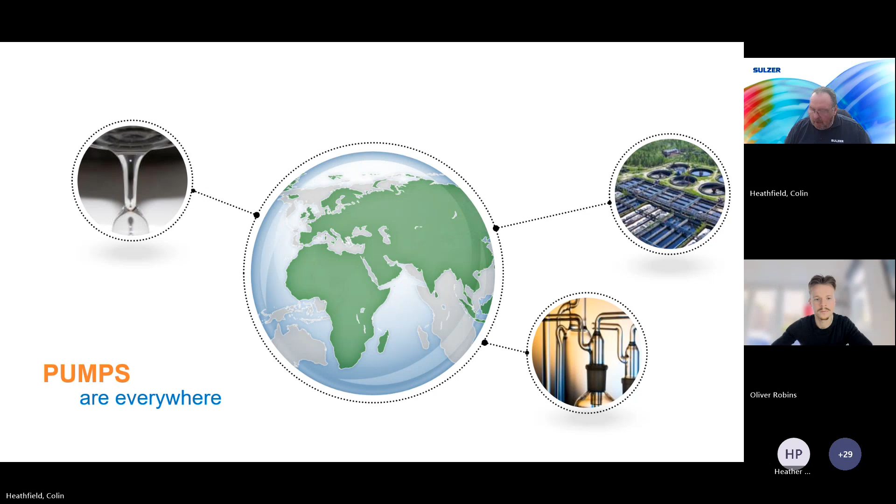And a pump forms part of what we call a system, because you've got a pump, the pump moves, and I'm going to say liquid, and I'm going to use the term liquid very loosely, because the pump is part of a flow system. The pump moves the liquid, but you want to move that liquid from somewhere.

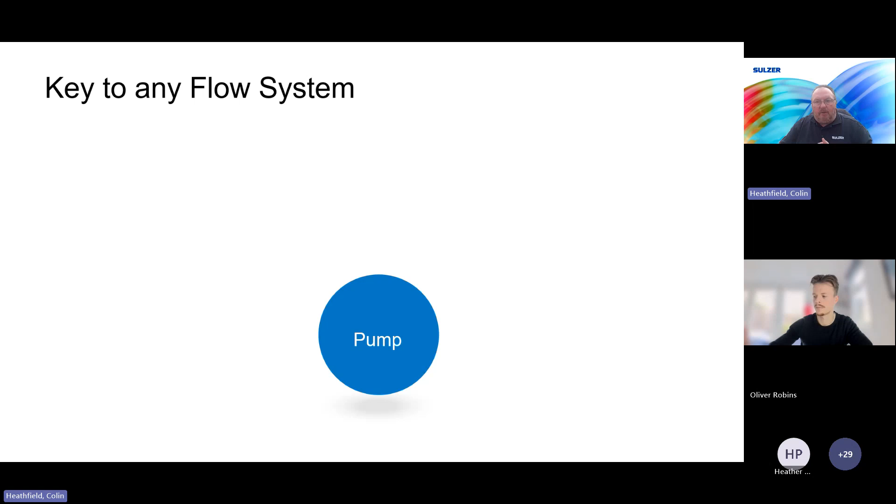We call that the suction side. It's where you're going to pull the liquid from, whether it's a pump just dropped into a swimming pool or whatever, it's going to pull that liquid through. So that's called the suction side.

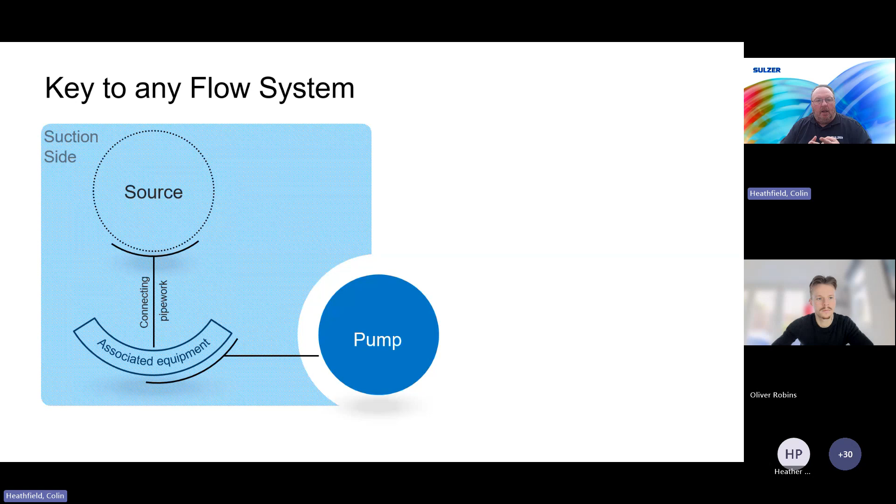And on that suction side, you have a source, you have connecting pipe work, and I've put there the phrase associated equipment. You'll have come across pressure gauges, temperature gauges, you can have flow meters, you can have things injecting liquid into the pump, and then it goes into the pump.

The pump then moves it to what we call the discharge side. And again, you get the associated equipment, the connecting pipe work to the discharge point.

Now, the key thing of this, the key takeaway, is you have a pump in the system, but there's a source where you need the liquid to come from and a discharge point where you want the liquid to go. You get sort of pump geeks like me that say, right, this pump goes there, can do this, can do that. But look at it as a whole system, not just the pump, because the system has an impact on which pump technology and what you're trying to do.

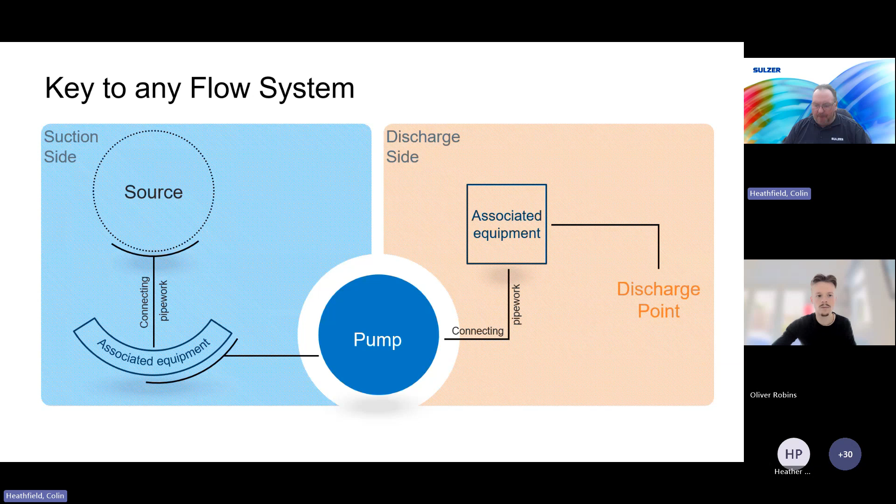But the key to the flow system is the pump. So we look at a flow system and we've got two parts. We've got what we call fluid dynamics and pump technology. Now, fluid dynamics are about the liquid, what you're trying to move, what you're trying to pump. What is the liquid or the media?

The flow rate is the rate at which you want it to move. The suction and the discharge are those two parts I've just explained. And then what do you need? Do you need accuracy? Do you need repeatability?

Do you need hygiene? You use those, dependent on the liquids. If everyone thinks it's pump to pump water, it's fairly easy. You get a flow rate, pressure head, which is the discharge pressure of the pump, and it's nice and easy. But say you're pumping sausage filling, or body cream, suddenly everything changes, and it might be different technologies and different ways of doing it. Say you're pumping an oil.

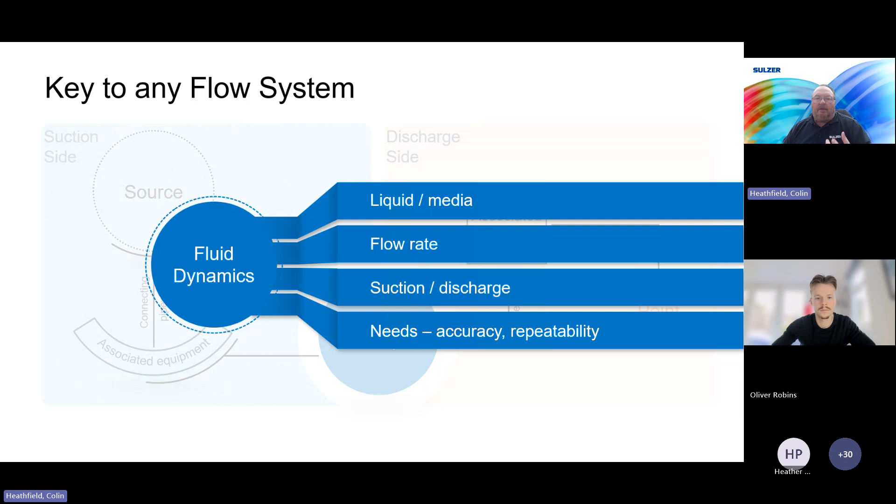So the fluid dynamics are a very critical part of what you're trying to do, to think of what pump technology you need, and you need to make it work. So you've always got to think of the fluid dynamics. And once you've thought of the fluid dynamics, you want to think of the best pump technology.

Then the area and the environment it's in. Again, another critical thing, because is it outside? Is it inside? Is it inside in a hygienic environment? Is it an explosive environment? I've pumped some very strange things over the years.

Maintenance. Is it easy to get to? Do you need to do maintenance? You don't want a pump that requires high maintenance, that you've got to have a confined spaces requirement to get down to, because it's hard work.

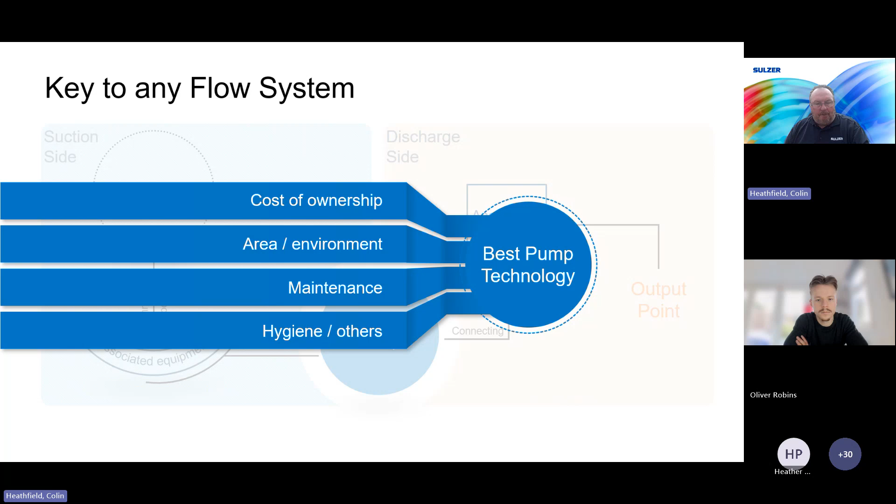And then I put hygienic, but there's hygienic, there's high temperature, there's high pressure. There's a lot of considerations to pick the best pump technology. And these are all important considerations for the flow system. And then once you've got the flow system, it all comes down to the pump.

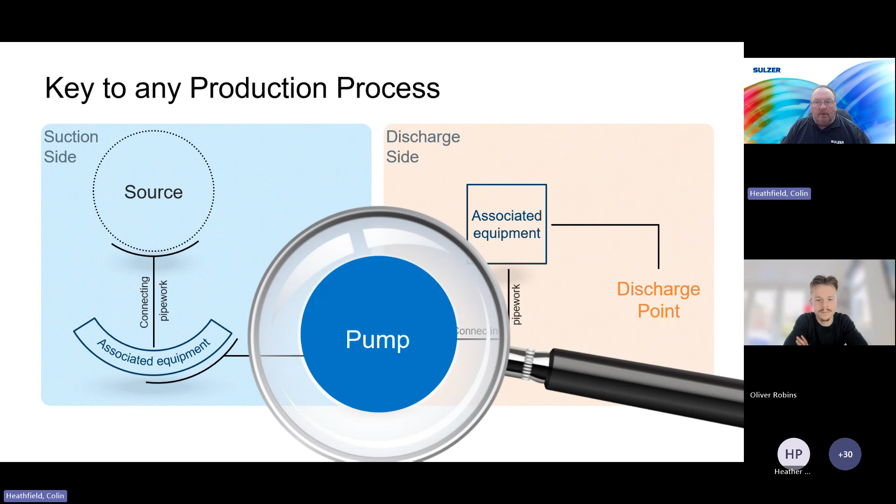So from that point, I'm going to talk to you about some pump technologies. I've got 6, 7, 8 pump technologies we can run through. Now, these are generic pictures of the pump technologies.

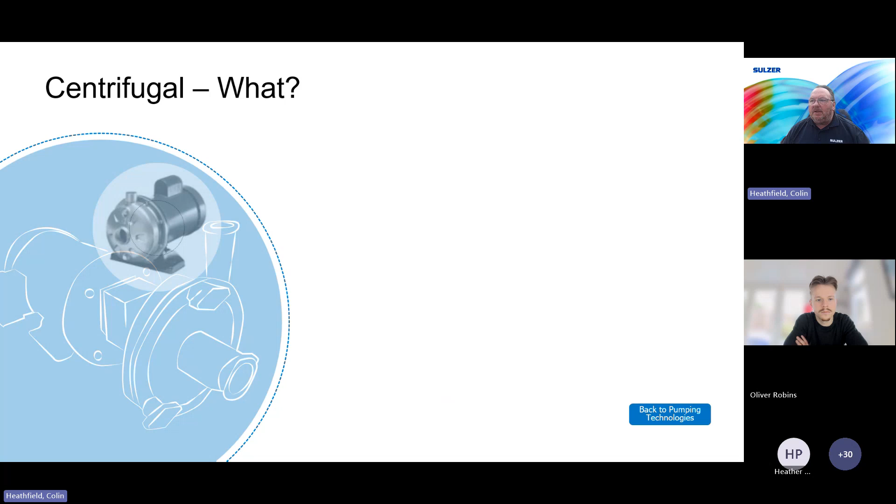They can be vertical, they can be horizontal, they have different impellers. But our life today wouldn't exist without these pumps. They're good for continuous duty. They are what we call a pulseless flow.

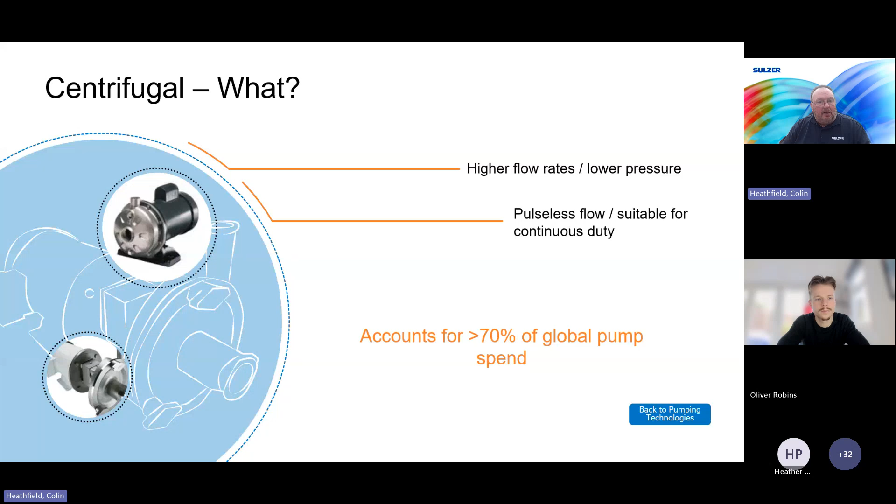So when you turn the kitchen tap on and the water comes out as a straight stream, that's a pulseless flow. And they can do very high flow rates. There's pumps that are bigger than me. I can sit at a table on a desk, sorry, on a chair inside the pump casing. They're that big. The secret is how they work.

So this is what we call an end suction centrifugal pump. This is just one example. If you look at it, there's a red bit in the center, which is called the impeller. Some refer to it as the spinny bit. So the impeller is where the liquid goes.

The liquid goes in what we call the suction side, although it doesn't do a true suction lift, it needs liquid there to go in. The liquid goes into the impeller, and then the impeller has vanes. If you look to the drawing on the right, these large vanes, and the impeller turns one direction, accelerating the liquid up these vanes into a specifically shaped volute casing.

So you see the volute casing, the blue line, that allows the liquid to then accelerate further to the discharge point, what's called the pressure side, and exit the pump. This is a rotational pump.

This is smooth flow. But the way this impeller works, there are many different types of impellers for abrasives, for solids, for soft solids, for hard solids, all sorts of things. We have recessed impellers, but they all fundamentally work in the same way, which is take the liquid, you see these particles spinning, send it, accelerate it round that volute casing and out. And that is essentially how a centrifugal pump works.

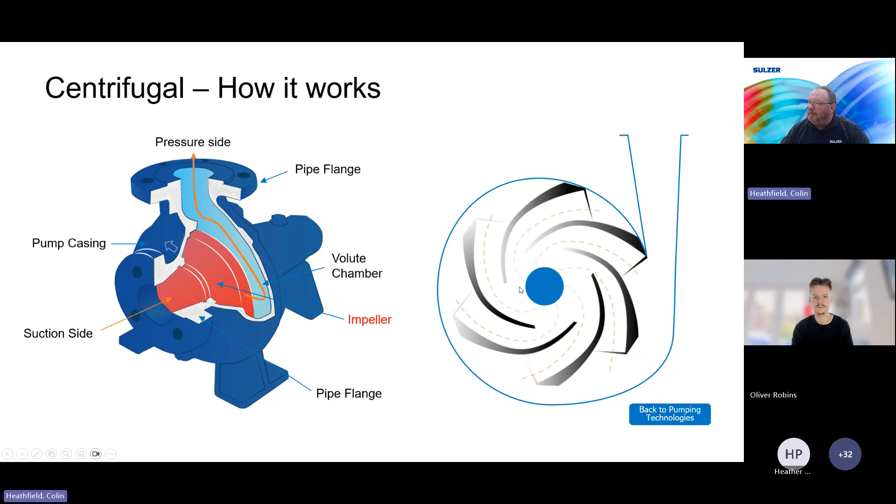If we think centrifugal, why? As I said, they're very efficient. They have a very good working life, and you can fit them with IE3 motors and things, so they give you a payback in that respect. In terms of the flow rate they can move, they don't take up a big footprint compared to some other technologies, and they're pulseless. They do have limitations.

They need liquid. They can't run dry. Run dry means running the pump without any liquid in it. They need liquid to run. We can adjust the flow rate slightly because we can fit what we call a VFD, a variable frequency drive, but there is limited control in adjusting the flow rate.

With extreme abrasives there are issues, but they are 70% widely used by the water authorities. They pump all the clean water in different formats, and then all the dirty water. Most things you use in life, from paint coatings to body products to hair products to a lot of foodstuffs, are used. These pumps are used within their production.

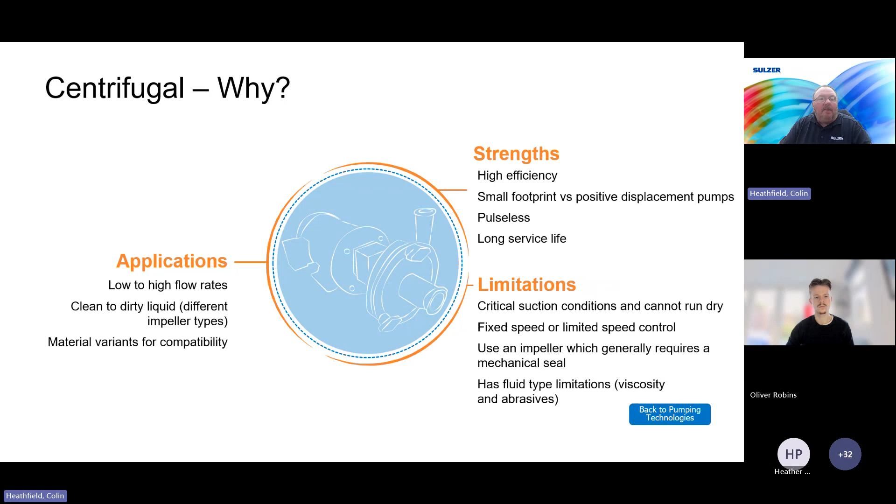That's my little bit on centrifugals. I'm going at pace, I'm afraid, because it is quite a lot to get through in the timescale.

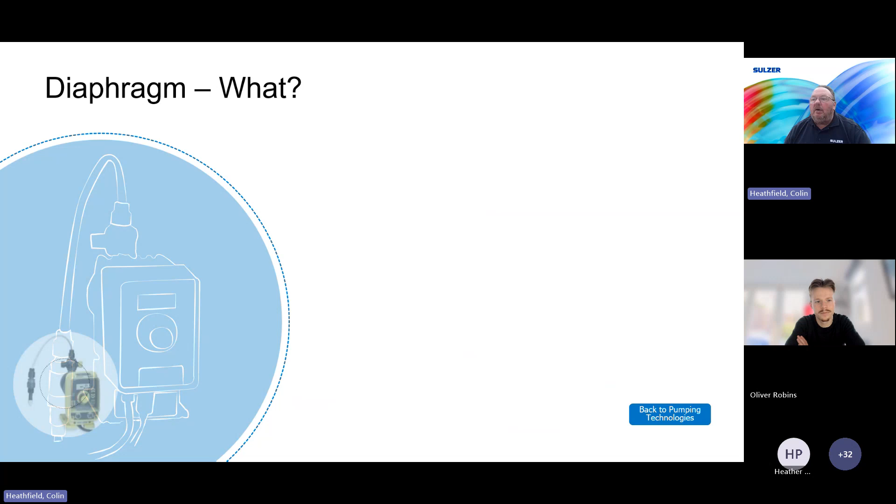The next one I'm going to talk about is a diaphragm pump. Some call it the flappy pump, because a diaphragm is a very basic pump. It has a minimal number of components in touch with the liquid. It is a true self-priming pump because it can pull liquid into itself, but only a limited amount. Within the industry, we define self-priming as just being able to pull liquid in. Some pumps can self-prime a lot more than others.

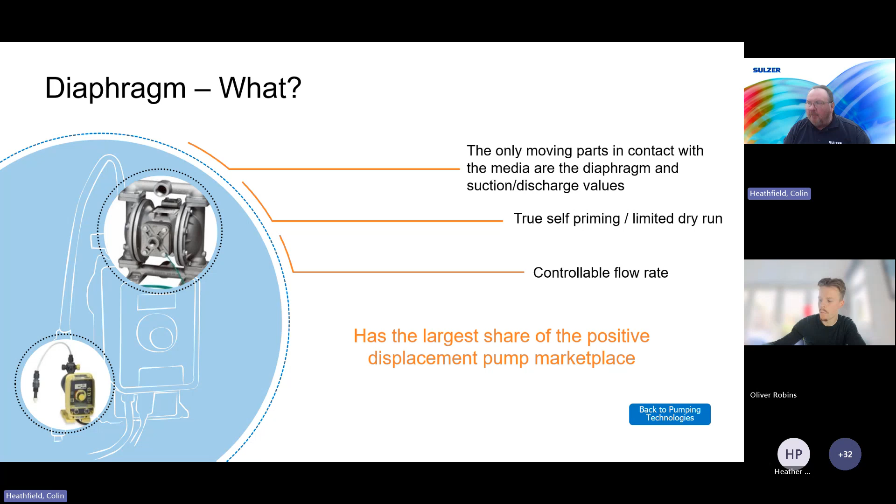Because a diaphragm is a very specific area that's moving, it's a very controllable flow rate. A diaphragm pump, as you can see from this animated drawing, has a suction side where the liquid comes in and a discharge side where the liquid goes out.

On the suction side, that's showing a ball valve. Can also be called a flap valve, but it's a ball valve. As the diaphragm pulls back and fills the chamber with orange liquid, it lifts the ball at the bottom, the ball valve, and pulls the liquid in. It's also pulling the discharge valve at the top down, sealing off that hole to ensure it fills with liquid. Then as the diaphragm moves forwards to empty the chamber, it pushes the liquid out the top past that ball and pushes the bottom ball into its hole to seal it and hold it there.

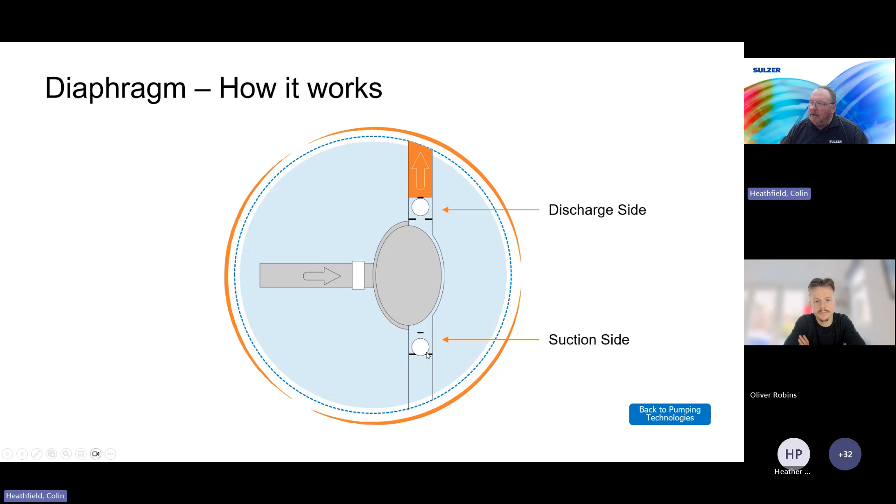It's not a complicated pump. It might be better explained by this drawing, which shows the pump filled in section 1, and you can see it's used something mechanical to pull the bar back and fill the chamber.

It then goes on to what we call the discharge stroke. It pushes forwards, starts to empty the pump chamber, pushes the bottom ball into its hole to seal that valve, known as a ball valve, and pushes the liquid out the top, which is drawing number 3. Then you get to drawing number 4, where the chamber is emptied.

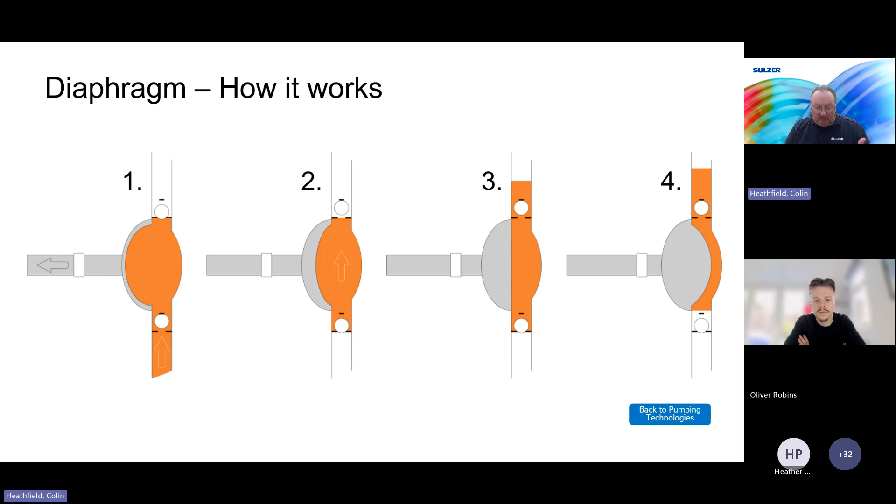It's again not complicated. But we have to think again, where would you use this pump as opposed to a centrifugal pump? These pumps can run on electric or air. Air is quite a favoured drive medium for them, so you have an air motor in there.

You look at the strengths, the applications, the limitations. They come in a variety of materials, and because of the nature of them, they can make them in plastics and some very chemically resistant plastics. They even go as far as, I know some companies do them in PTFE, which is one of the most resistant plastics we have. They're very good at going at a steady, repeatable flow.

The reason maintenance works well is because they're not a complicated pump. It's a very easy pump to strip and repair. There's not some of the finer assessments and adjustments you have on others.

They don't like abrasives, because if you think of those balls that are in the ball valves, if there's an abrasive flowing past that, it will wear the ball and stop it sealing. The ball will eventually—I've seen it where they come through that hole.

They're very good for chemical use. They're used a lot within the food industry as well, but they tend to try and use metal casings rather than plastic casings. This picture here is a very small one, so they're very good at small dosing. You may have seen them if you've been to some of the treatment works, used in the dosing capacity as a small version.

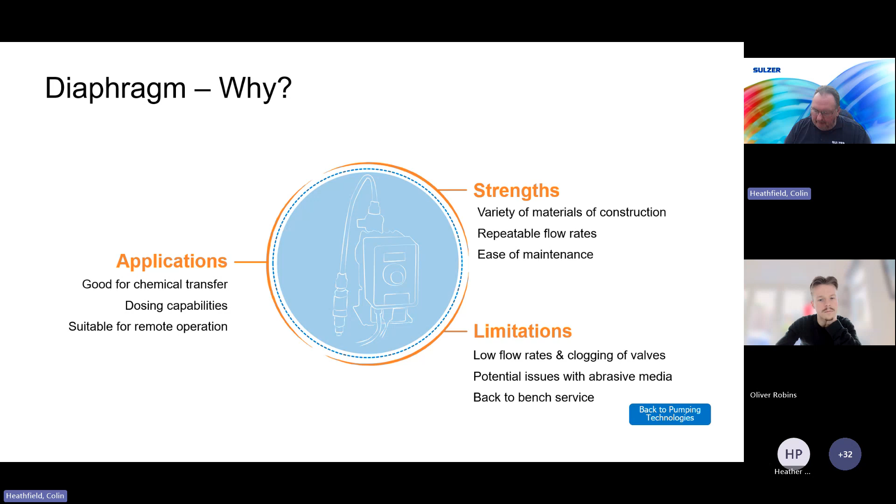That's essentially the diaphragm pump flying through these. The next one I'm going to go to is called a gear pump.

The gear pump, just a couple of examples, can be very small, what we call a micro gear pump, then come to a slightly larger version, and they can get bigger still. The thing with the gear pump, it's another spinny pump, very accurate and pulseless, but it can also achieve high pressure. So anywhere you're doing hydraulics, they're used a lot on diggers and things like that for the hydraulics to lift the arms.

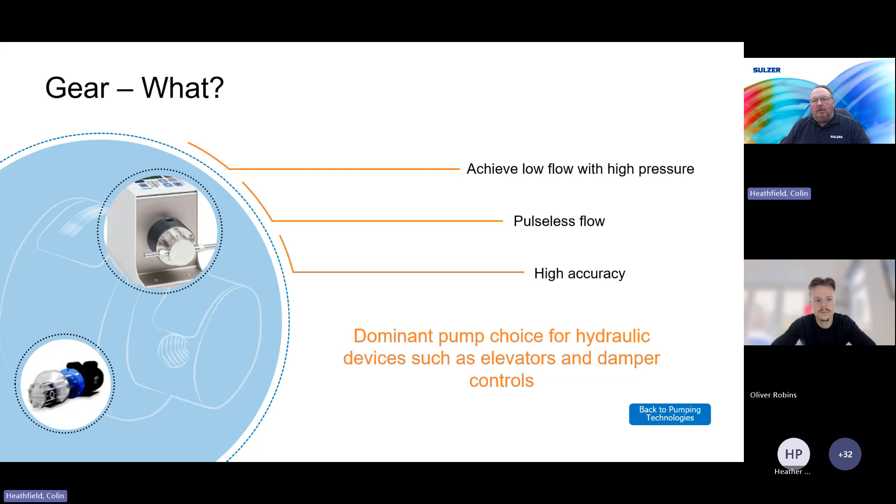Their operation isn't complicated. Again, one little picture for you. Liquid in, liquid goes round the outside of the gears. It's called a gear pump because it's two gears working together, one a driving gear and one a driven gear.

You have very key points: they have to seal against the outside of the chamber, and then they have to seal against themselves as they're put together. These gears can be made of plastic for chemical resistance or metal, dependent on what you're trying to do. But the sealing of the gears against themselves and against the outside is critical, because if you don't have those sealing points, i.e. the tips wear, then you'll get backflow. The V of the gears is called the mesh point, or the gear valley.

It's just the faster you spin the gears, the more liquid you push through it. So it's not a complicated technology as such, but having the understanding of what a gear pump is does help you understand what it's going to do. It's very good on things like oils, but you don't want to pump body cream because you would chop it up.

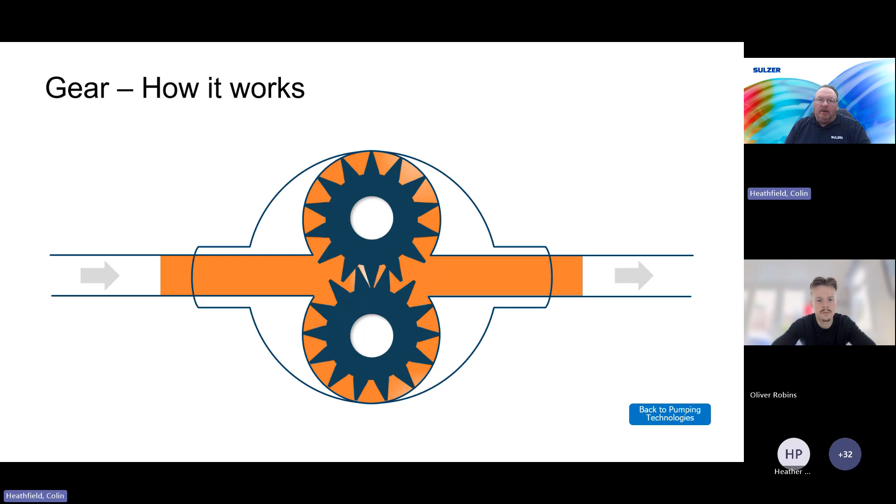That's why they're very strong within the hydraulic industry, but they're also very accurate for small dosing. You have the gear valley I was talking about, you have the mesh point I was talking about, and the top one is the driving gear and the bottom one is the driven gear. That's done by a cog behind, not gear to gear like that.

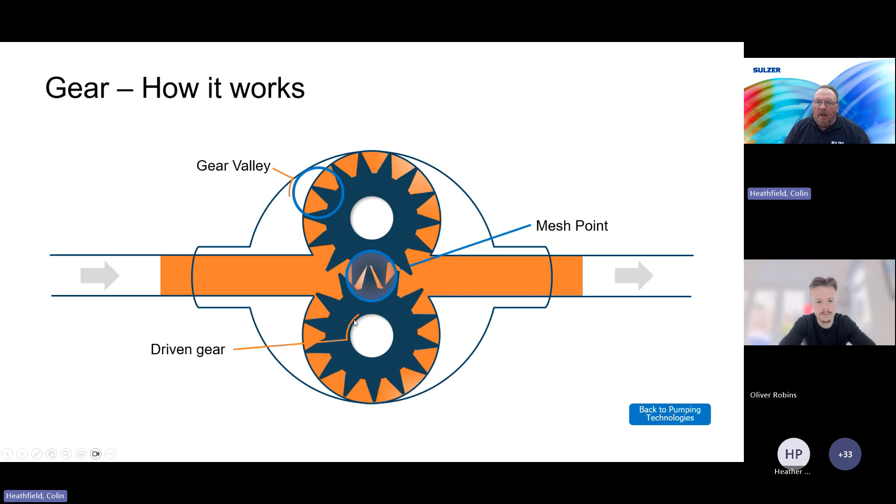And then you look at gear pumps and it's back to another why: good working life, but it's the accuracy and the medium viscosities. I've said the oils, we've said the hydraulics. They can't run dry, because if they run dry, the tips will heat up. Where there's contact, you get friction, friction creates heat, and that causes damage. But they are very accurate and they can go for very high pressures.

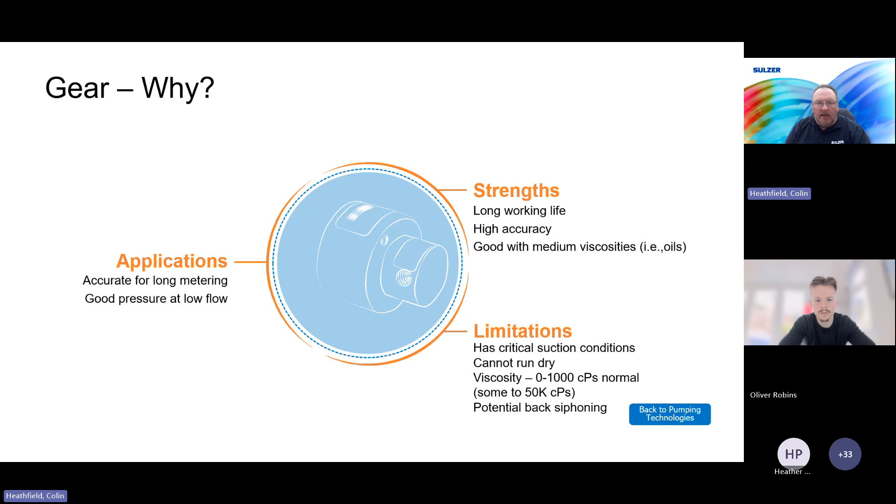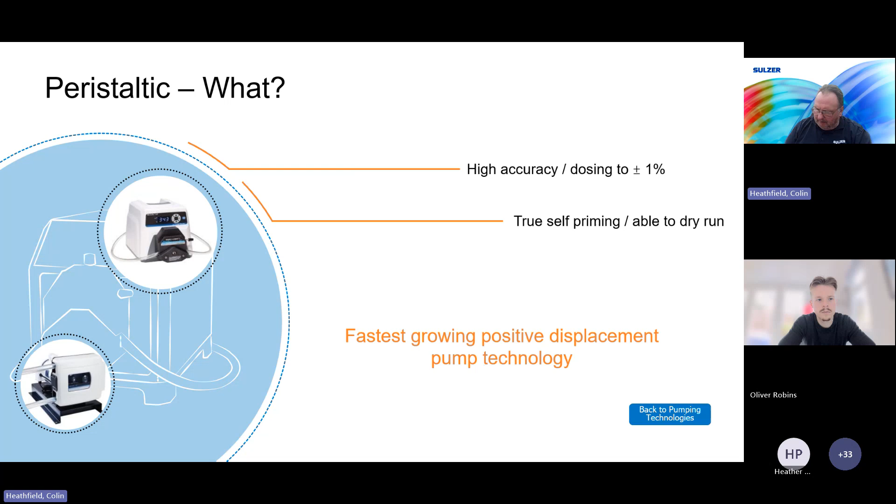The next one I'm going to talk about is peristaltic. So what is peristaltic? I ask, how many pumps do we have in the human body? People say, oh, the heart's a pump. Yes, the heart, it's almost like the diaphragm pump. But there's also a peristaltic pump, which is the esophagus, because that's a tube that squeezes, moves, and releases.

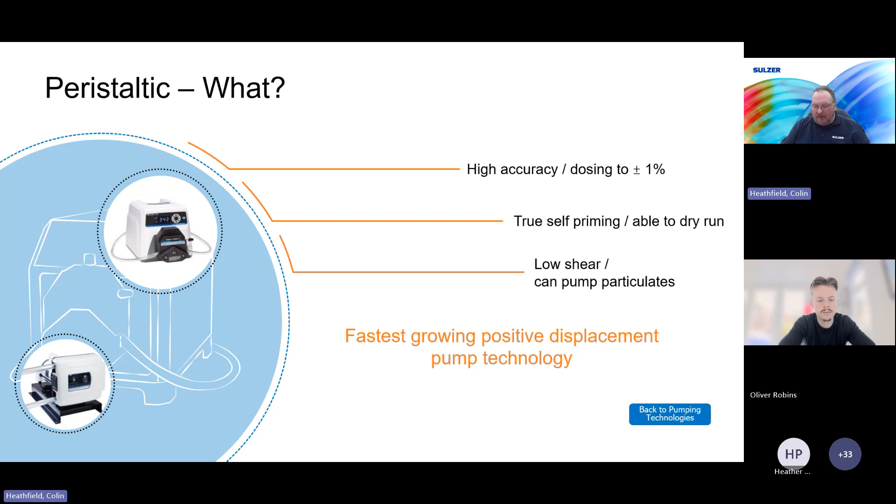So it's doing it with a tube. Now, we use the term tube because a tube is an extruded plastic tube, so they go very small and very fine. But they also make what they call hose pumps, where they have a much bigger hose because it needs reinforcing. These can actually go up to 4-inch, 6-inch. They make very large versions.

And again, there's very specific applications for them. They're very strong within the pharmaceutical biotech type market. They are very good for pumping things like live cells because they don't damage it. They grab slugs or pockets of it, and as the roller comes onto the tube, it pushes the liquid forwards and backwards. So it's not really trapping anything in the gap between. Hence, the bio industry is very strong with these.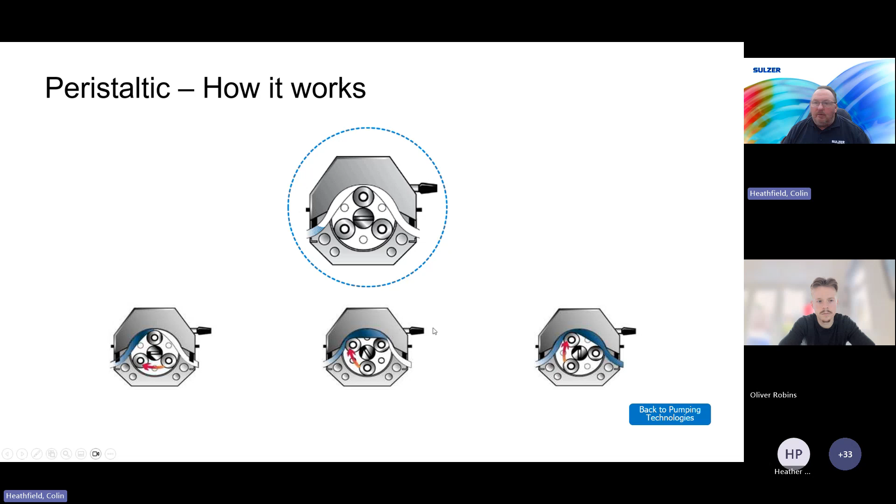The peristaltic strengths: they have good flow ranges, not the biggest, but not bad. The liquid is contained within the tubing. It's very easy to keep it hygienic because you have a tubing that you can autoclave and then put in the pump, and it's very hygienic. Their dosing and dispensing are their key things.

They're very much handling what the other pumps can't. The tubing is a consumable, like car tyres, and the flow rate and pressure is limited by the size of the tubing. But it's also very, very accurate. It's not the most accurate pump, but it can be very, very accurate.

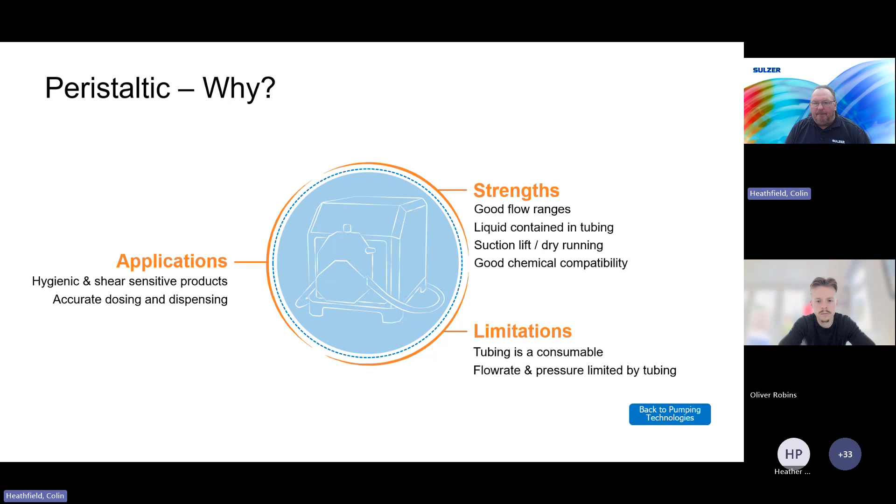The next one, piston pump.

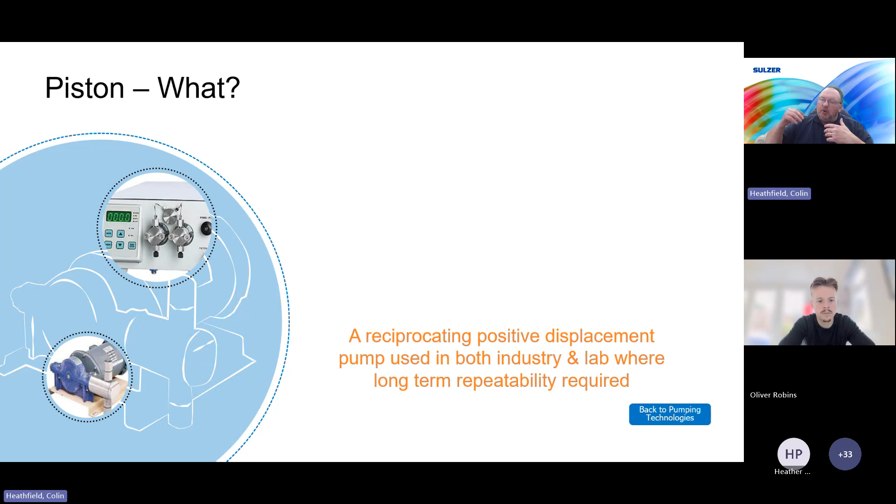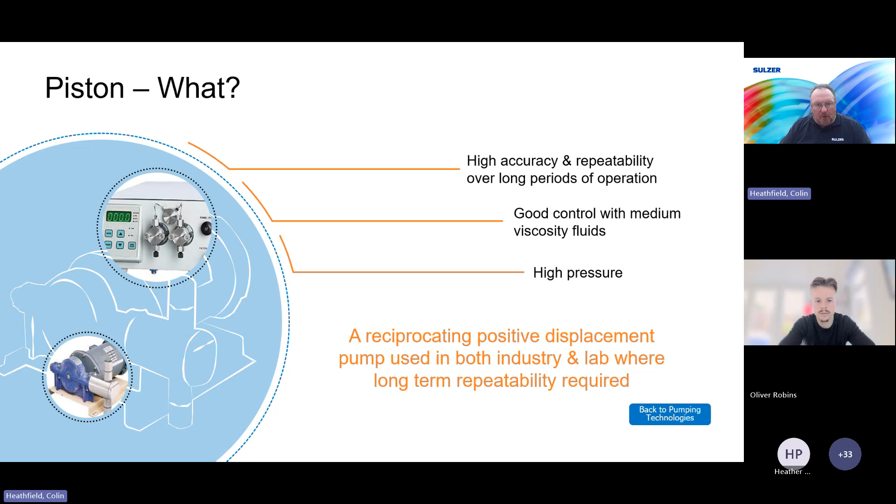So piston pumps, and different types. Shown there, a micro piston, and then a large version of a piston pump. It's very basic - people say you've got pistons on your car if you've got an old school car, and you do have pistons, moving through a very specific area. That's why they're called positive displacement pumps, along with others like diaphragm pumps. A piston pump moves a very specific amount of liquid at a time, allowing control over that liquid, and because you're moving a piston in a bore, you can achieve high pressure.

It works by moving a piston, the blue bit, backwards and forwards in what we call a pump chamber. The ball or sealing arrangement is very similar to the diaphragm pumps we were talking about, and again they can have flaps instead of balls. But you have to have a seal across the side of the piston to stop the liquid leaking back, and then invariably an electric motor running a cam. It's got a suction valve on the suction side and a discharge valve on the discharge side, so you need both valves to make it work, otherwise it would just warm the liquid up.

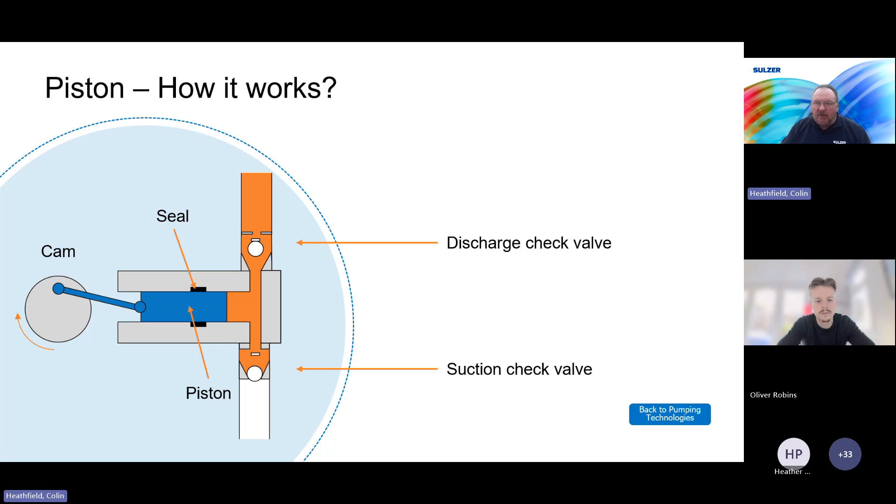There's a slightly more radical version called a rotary piston pump. This uses a motor directly onto the piston, bringing it backwards and forwards as it turns. So it's not just using the piston side, it's turning at the same time to use that as the opening and closing of the pump. Your suction stroke has a little bit on one side letting the liquid in as it's going back, then it turns round, and as that reaches the other side, it pushes down and pushes the liquid out. This allows very accurate control, but these are only on a very small, micro scale.

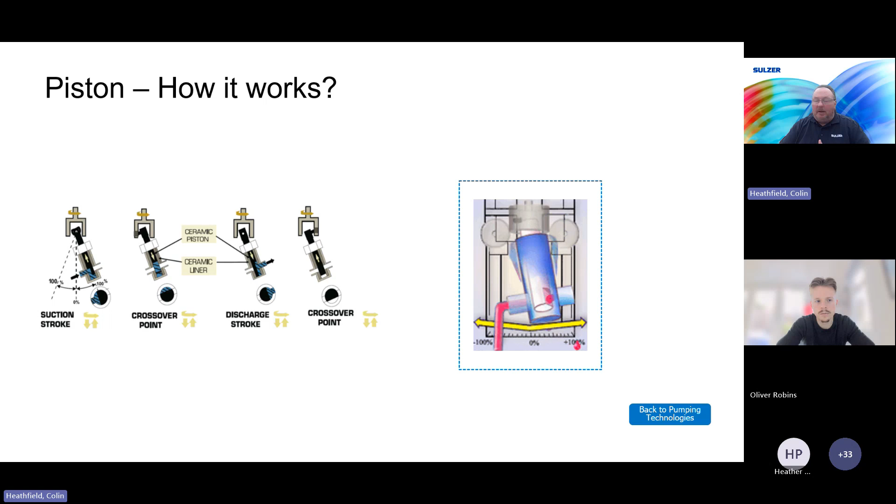But piston pumps can get very large, and a lot of the original Victorian-designed pumps were piston type pumps - just a big thumping pump, I call it sometimes. That's the technology, and you look at piston pumps and think, yes, they can achieve high pressures, and they're very accurate and repeatable. But that's why we talked in the beginning about what you need the pump to achieve for you.

Because in some ways they have greater wear rates. They can handle certain liquids but not others - they don't like particulates, because you're going to get issues with particulates going onto the seals and onto the valves. And they are what we call high shear. If you move a liquid against itself, you're shearing it, and if you put a lot of force into that liquid, you can also shear it. So if you're looking at shear sensitive liquids, you can damage them - things like some food products and bio products, it does have an impact on them.

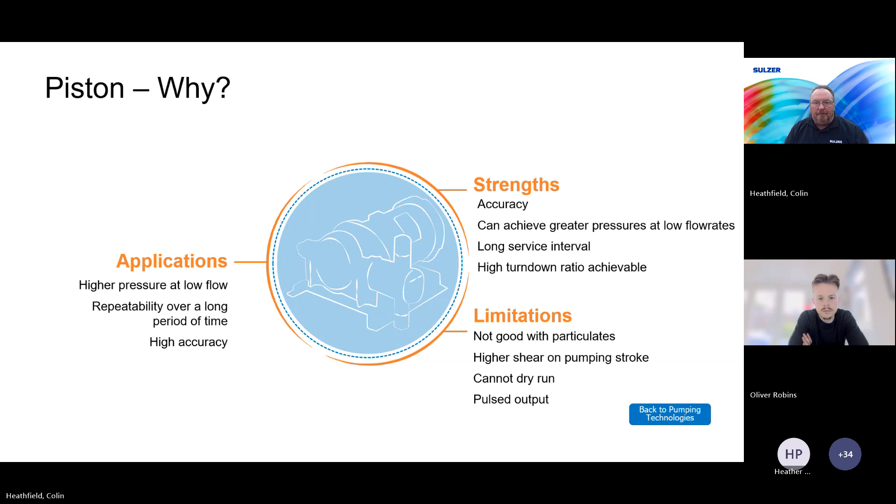And then I go to progressive cavity. Sorry guys, this is flying through at pace just to try and make it all make sense. Progressive cavity is a little more complicated, and again you'll come across these - used from the food industry to heavy industry. It's a more complicated pump, but a very useful one. The only thing is, the bigger flow rate you need, the bigger the pump has to be, so they take up a rather large footprint.

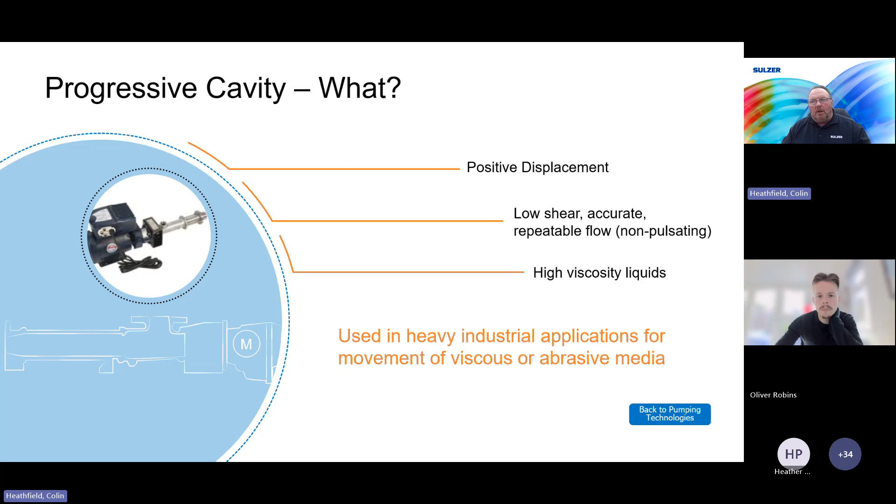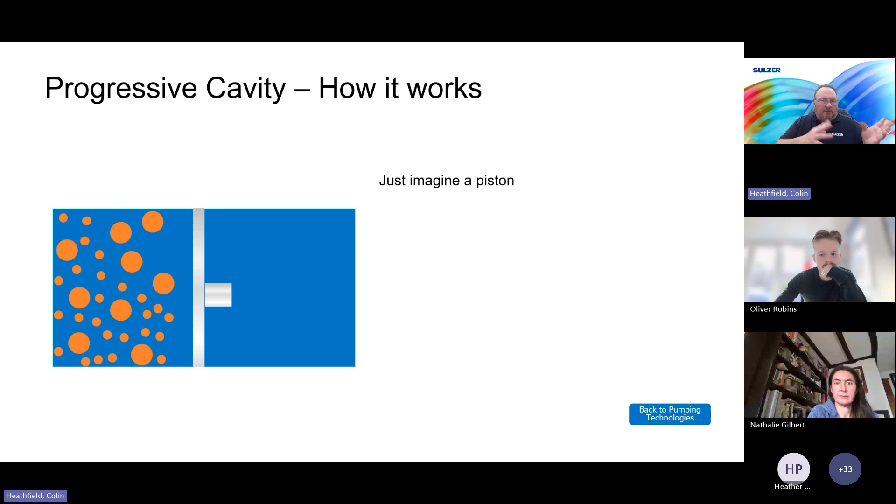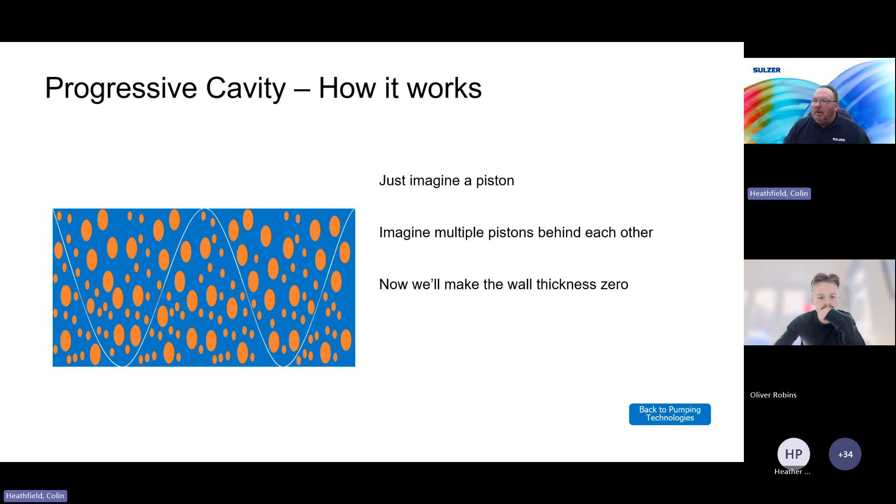They're again called a positive displacement pump, so it has a very specific movement which moves a very specific amount of liquid. But the way they work, they're what's called low shear and high viscosity. Imagine a piston - you've got a pump chamber with a piston, like we just talked about. Now imagine several pistons behind each other, and now make the wall thickness of those pistons zero, so they're all pushing at once. You end up with an arrangement like this, because what they do is a worm drive turning within a rubber chamber - it's a continual set of pistons, sealing off to the rubber chamber. It's an endless sort of piston PC pump.

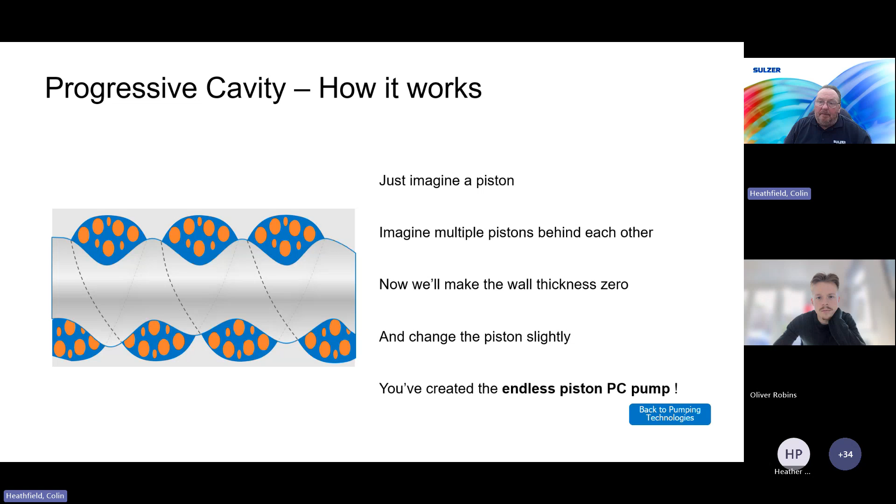So you'll have the inlet and the liquid flows up. The liquid, by the way, is the blue liquid with the orange spots, and it flows like this, continually going through. So they're very good with thick solutions, thick creams and things like that. Yes, there is a wear component - the rotor is a stainless steel rotor, and the stator, the rubber bit, is normally rubber, so it does wear, but it's very effective at what it does.

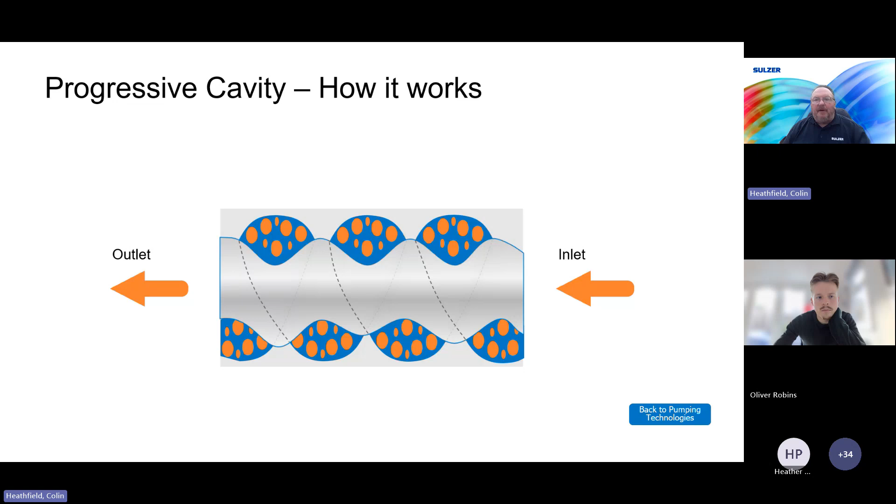Colin, we have a question from Heather in the chat. What's turn down ratio? Does this relate to pressure? Turn down ratio doesn't relate to pressure - it's about slowing down the pump.

So you would talk about a turn down ratio as being slowing your pump right down. What can you slow it down to? So if you're running one of these, a progressive cavity pump, and you wanted to reduce your flow rate to half, that's what you can achieve with your turn down ratio.

Does that help at all, Heather? Give a thumbs up into the chat if that makes sense for you. I'm happy to deal with the question and give more detail at a later date if you want. Heather's happy with the answer. Thanks, Colin, brilliant.

So progressive cavities, we said slurries and abrasives, because they're not putting much energy into the liquid, so they can cope with the abrasives because they've got the rubber stator. If you're pushing something that's water and sand, which is probably the most brutal solution, if it hits metal, it's going to abrade it quite hard. If it's hitting rubber, part of the energy in moving it is reflected back into the liquid, so it does less damage.

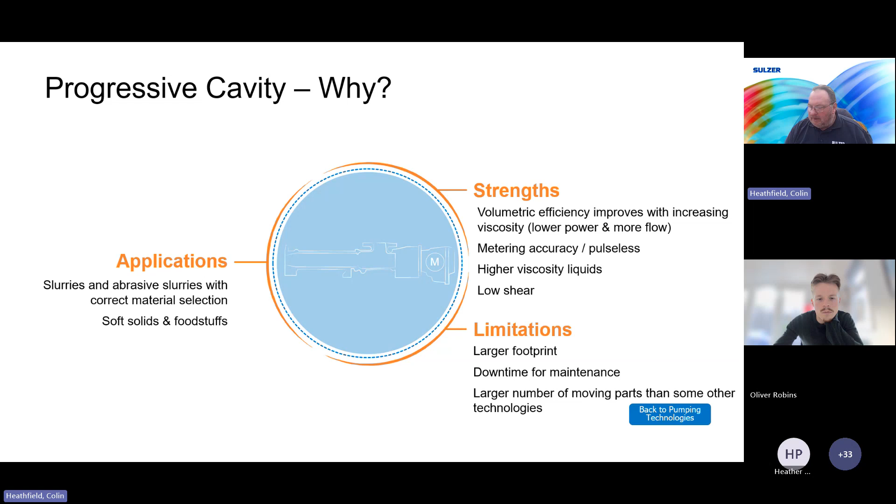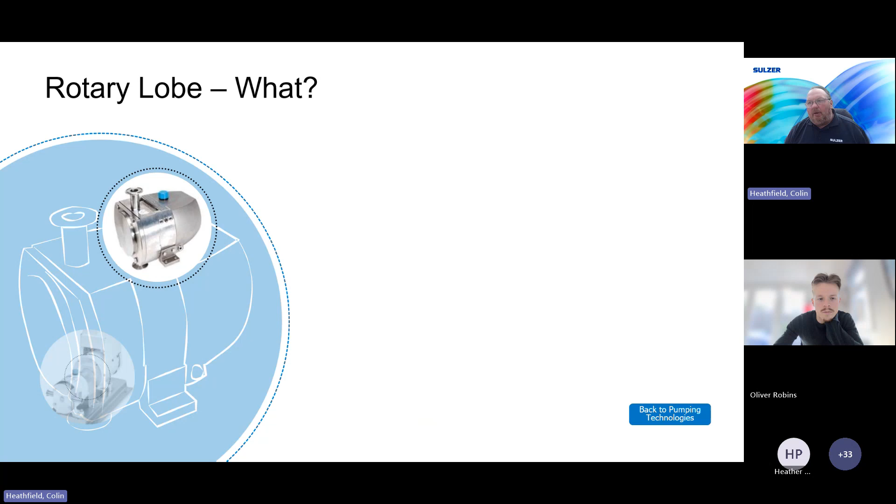And then we've got rotary lobe. This little one here is very much hygienic, very much the food industry. We talked about the gear pump, but the rotary lobe is similar but very different. The reason I say it's similar is it's got two rotating elements inside. It's very good for handling liquids containing solids. If you were pumping soup and things like that, and you didn't want to damage the product, they're very good for that. And they're very good for sanitary or hygiene because they're stainless steel invariably.

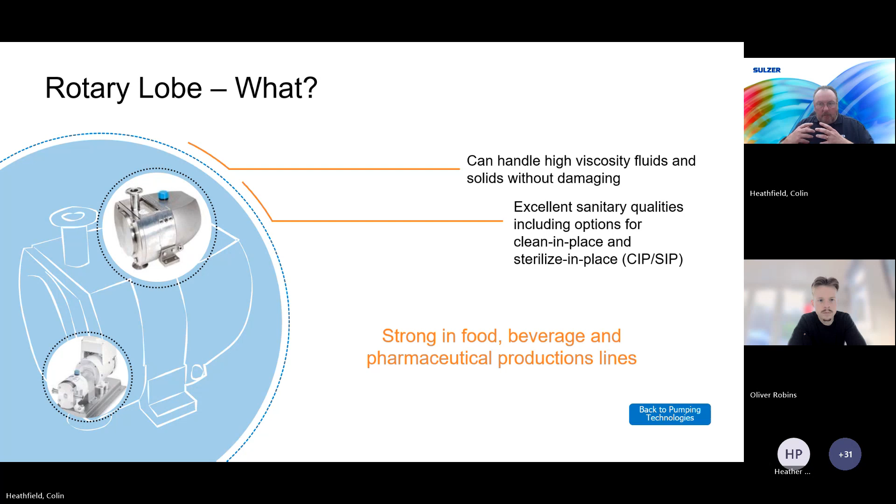So we have what we call CIP and SIP, which is clean in place and sterilize in place. Clean in place is where you put a cleaning liquid through it and flush it, essentially. Sterilize in place normally involves pushing steam through it at a certain temperature to ensure that it's clean. A lot of the food production facilities use this sort of pump.

It works, as I said, in a similar way to the gear pump. Your liquid comes in, but because it's called rotary lobe, you've got a chamber again, as we were making the chamber in peristaltics, so we make a chamber here. The liquid comes into the chamber, there's a little swift close off there, and it keeps it in the chamber till it pushes it out the other side. Again, you've got this sealing face here, but the liquid comes into the chamber and goes through. The faster you spin them, the faster the liquid will go through. Again, when you strip the technology down of what the pump's doing, it's not complicated. It's all the other bits working around it to make it happen.

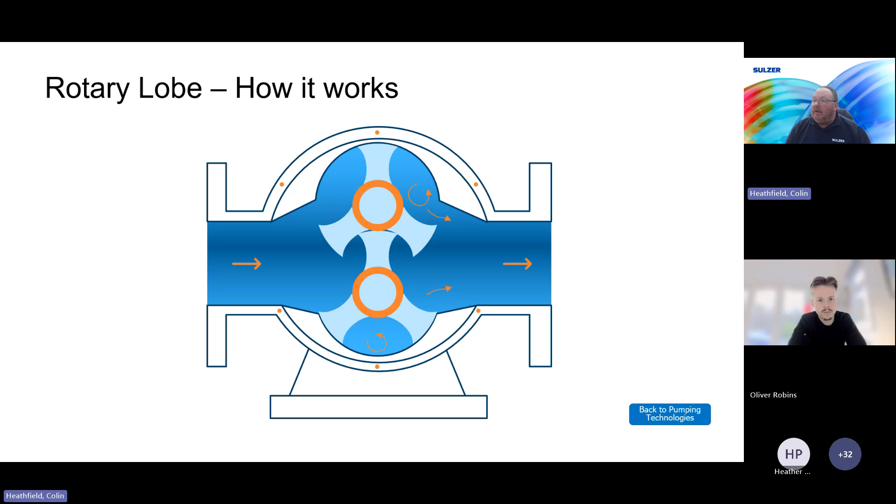This is, as you can see, very good for the foodstuffs, for the thicker liquids. The strengths, the limitations, the applications, sanitary - it is very much sanitary. So all food and hygiene stuff has to have certain flanging things that can be cleaned.

It's suitable for special cleaning processes, and it's good with slurries. It can't run dry, which is something we said. The ones that can run dry are basically your diaphragm pump for a short period of time, and the peristaltic pump for a longer period of time. This is why I go back to those two points at the beginning - you've got to think what you're trying to do with the pump and what you need it to do. But they have a good life, a very long life. It's a more complicated service, but it does a vital role.

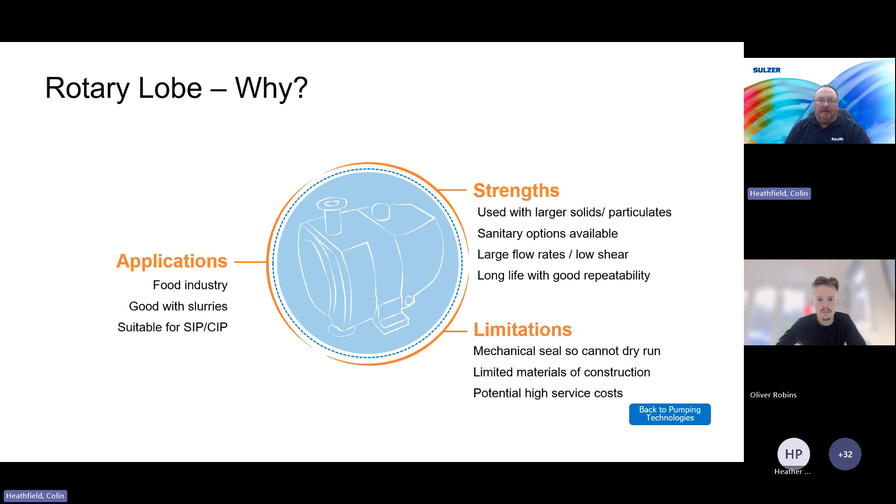And then the final one I've got to talk about, I'm just about doing okay on the time I think Ollie, is the syringe pump. So the syringe pump - you think, no, just used in hospitals, whatever. Very much in the biotech, very much for high accuracy. And when I say high accuracy, this is lifting it to the next level. This is talking flow rates of, that look up there, that's picoliters. You couldn't imagine a picoliter.

And then this high rate dispensing, you're talking dispensing accuracy of 0.355%, repeatability of 0.05%. Most pumps are nowhere near that. And it's pulseless flow because it's pushing. It's essentially like the piston, but much smaller flow rates and very, very strong control.

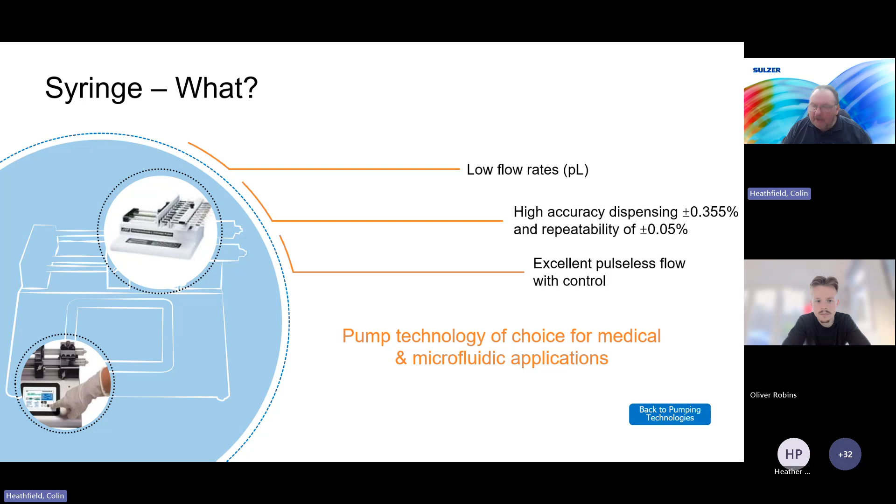And the reason they use the very strong control is because it uses a thing called a stepper motor to drive a little drive that pushes that bit, called a plunger, into the syringe. That looks like a hospital syringe - it is. And you can see the drawing on the right shows your stepper motor, which is turning slowly and measuring how slowly it's turning through a gearbox, so it's a small wheel to a bigger wheel to achieve that flow rate you require.

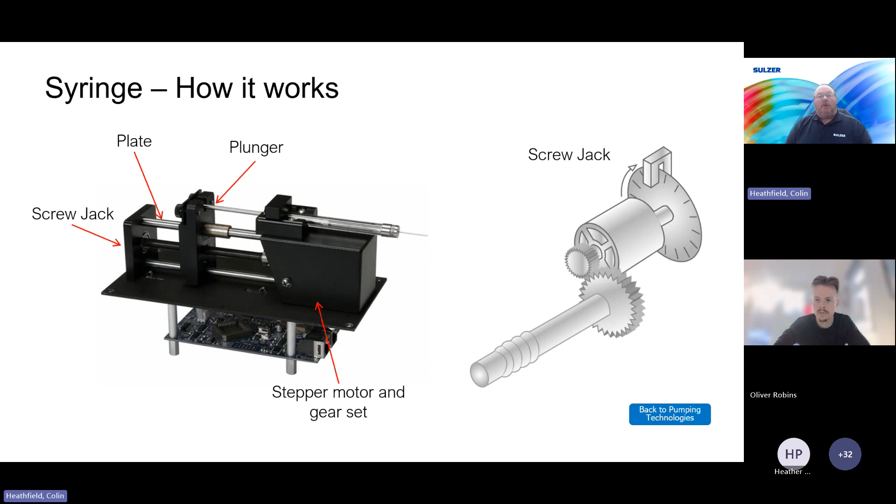But this picoliter accuracy is essential, especially within the biotech world. And they can achieve what I call the push me pull you, because they can put a syringe the other way - so as it goes either way, it'll push one syringe and the other one will fill, keeping this very accurate flow. I doubt you'll probably come across these in what you're looking at unless you're going into laboratories. But I once used them when I was recreating a reservoir dosing system on a micro scale for a company, and that micro scale was to ensure that the system was going to work.

And then you look at why syringe pumps - the big thing we said at the beginning, highly accurate. You can get higher pressures, up to 100 bar, because you can have metal syringes. You don't need to see what's in the syringe, so you can have metal syringes. There's also that push me pull you, and you can have multi-channels because you can have many syringes going at a time. But they are only for very low flow rates.

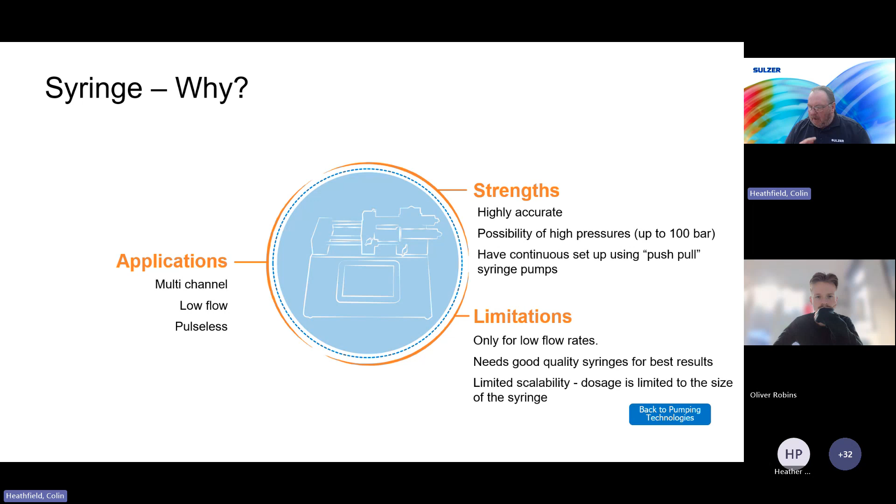I think I've pushed through this whole presentation at quite a pace. And it's very much, you've got to think efficient life costs, you've got to think the correct pump for the application, because these things go with reduced service need.

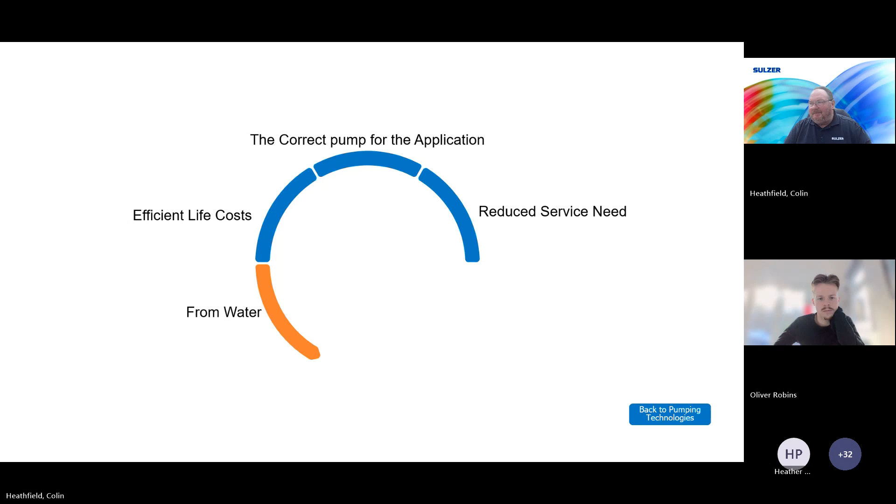Wait for the next one to come up now. From water and many liquids in between - there's one more to come, to waste. There's a picture of everything. But if you look, you're sitting in front of a computer - pumps were used in many different parts of manufacturing that computer. And if you've got a glass beside you, there's a coating on that glass, so pumps were used in doing that coating. If you've got a mobile phone, if you've got a cover, the walls painted around you - so much of what we do is impacted by the pumping industry and picking the correct pumps.

Now, I've just gone through those technologies and had a brief discussion on them. It's just very basic because it's a 45-minute session. But if there's specific ones you want more detail on, if you find it interesting, then please ask, and we can mention it to Ollie, put it in the feedback, and look to develop some more.

It's quite difficult doing it just on Teams - I'm kind of getting a workout because my arms are moving all over the place as I explain things. But I love pumps, I'm quite sad, because they do make a difference. And foodstuffs - everything from burger meat to dog feed, there's just so many things I want to get to. I've pumped pharmaceuticals - it's just different things. Chemicals, it's different things, used in different ways, whether it be water treatment or chemical process.

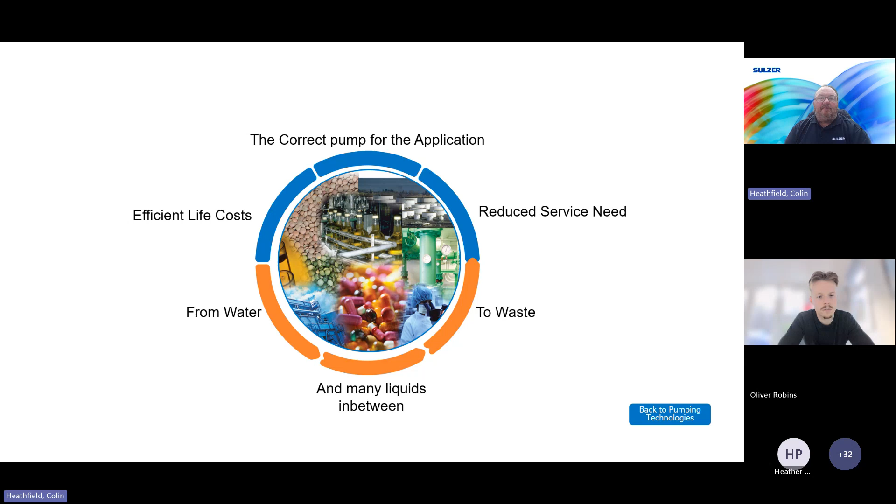I'm going to end my presentation there if it's all right, Ollie. I shall come out of that and stop sharing, and then see if anyone's got any questions.

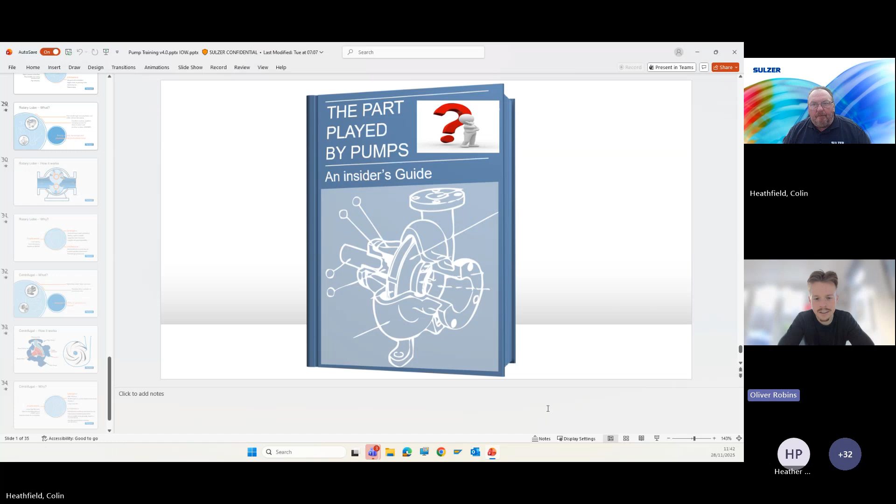So firstly, I'm interested in pumps used at sampling taps. I'm never quite sure why the pumps are left in different conditions when not in use - example, hand, auto, or off. What would be the benefits or risks associated with each?

So I missed the first part - I'm interested in pumps used at sampling taps. Right, so if you've got hand, auto, or off - hand I'm assuming is manual, auto is going to be an auto function, and off is no power. You'd be better just turning it off and not powering it. Auto may be if it's going to a specific sampling machine or something like that. Be interesting to see what sort of pump they're using.

Just take a picture of it and send a picture, yourself or the institute, to me, and I can have a look and we can have a bit more formative answer if you want.

Thanks, Colin. And second question from William - some sample points become aerated and can give falsely high turbidity readings. What causes some pumps to give aerated water, but others pump water without issue?